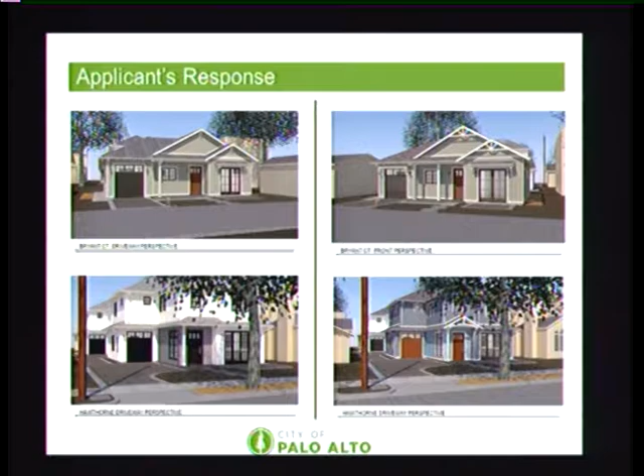The applicant has provided a material board with color swatches, and they've also responded by incorporating more native species into the landscape plan, replacing 6 of the originally proposed species with western redbud trees, Sonoma sage, bush anemones, and other native grass and shrub species.

The project is compliant with the comprehensive plan and all applicable design guidelines. The one issue that still remains is consistency with the performance criteria outlined in the code regarding trash disposal enclosures being located as far away from abutting properties as possible.

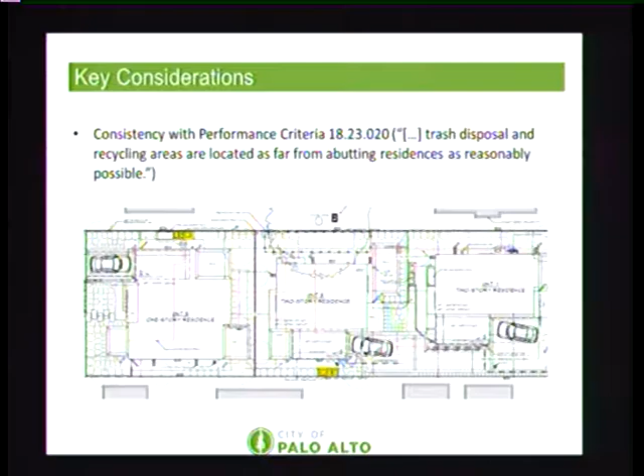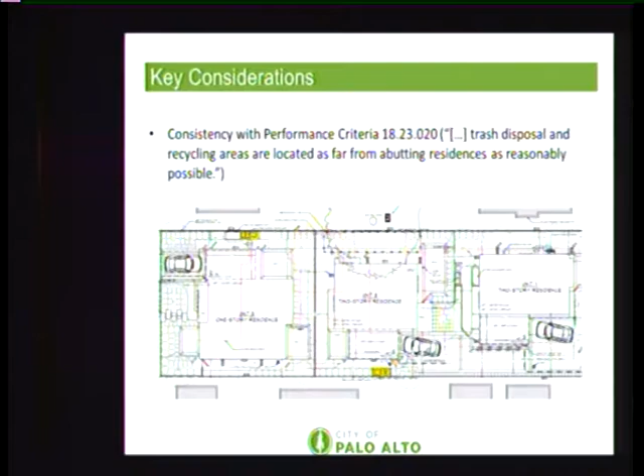As you can see in the highlighted portions of the schematic here, the trash enclosures are abutting the shared property lines on the left and right, of Unit 3 and Unit 2. So we've written a condition of approval to have these enclosures moved closer to the units.

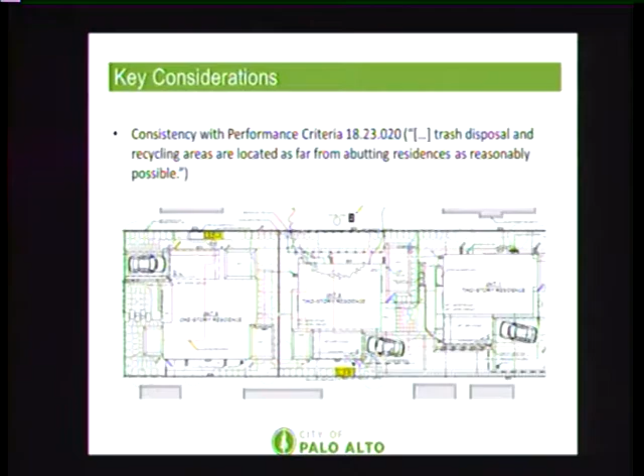That is a consideration we'd like the board to discuss. Otherwise, staff is recommending that the board approve the 3-unit multifamily condominium project based on findings and conditions.

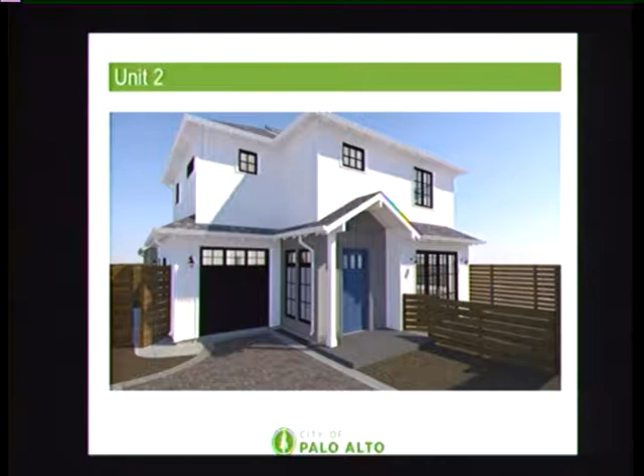I have a question, please. Good morning, Philip. Could you address for me, please, what the code requirements actually are regarding trash enclosures and bicycle lockers for projects of this nature?

Sure. Our wastewater, stormwater division requires trash enclosures for multifamily developments, a separated area and covered enclosures.

But I guess I want to get into it a little bit more deeply. Do they define what they mean by trash enclosure? Are the plastic buckets that the utility supplies us, are those considered carts, or are those considered enclosures, or are they required to build some separate structure? A designated area and structure to house the rubber containers. And is there anything in the code specifically saying what they mean by structure?

It's not common on residential stuff to build a garbage enclosure. Well, this is specifically for multifamily development. Okay, and for bicycle lockers, the same?

For bicycle lockers, what's the standard on that? What is the actual wording of the code? The standard for this type of development is one long-term bicycle storage unit for each unit. And what does the code say? Are the actual words in the code 'a storage unit,' or is it just 'a storage area'? How is it phrased? I don't have it off memory, but I can provide that.

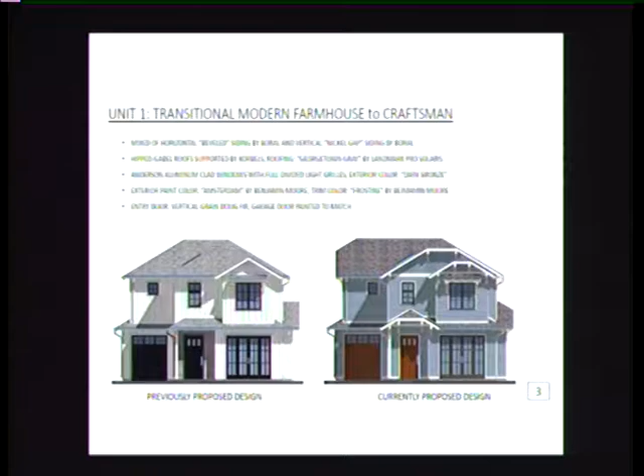And then I have a 3D rendering of it from Hawthorne with landscaping. This is an approximation—please note that's probably a 3 to 5 year landscape-developed approximation. This isn't the first day construction's complete with all the landscaping planned, but ultimately it would end up looking like this.

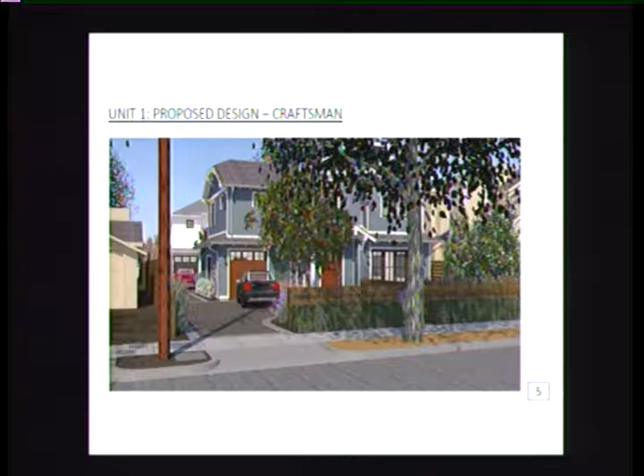Next is the center unit, that's unit 2. I didn't change much, because I was hoping the board would allow the property owner to at least have 1 unit as they originally requested, as opposed to no units. I did add a gable over the entry, realizing that it would help identify the front of the house, even though it's in the center of the site, as the place where you enter.

When you think about it, where those sliding doors are, in this image to the right, that's where a courtyard would be, with a 3 to 4 foot high fence around it to help identify that, plus landscaping. I felt like, since I was going through this exercise, and maybe I missed it previously, that this made a lot of sense to add this gable here.

I considered, but didn't do, adding a gable over the second floor larger window to the right, because of the daylight view issue the homeowner on Waverley was commenting on in previous meetings. I thought that would add some visual interest and a little more style to the house, because it is somewhat simple, I would admit, but I really tried to maintain that valley of openness so the neighbor would not see one more added-on feature to the roof. So I elected not to do that.

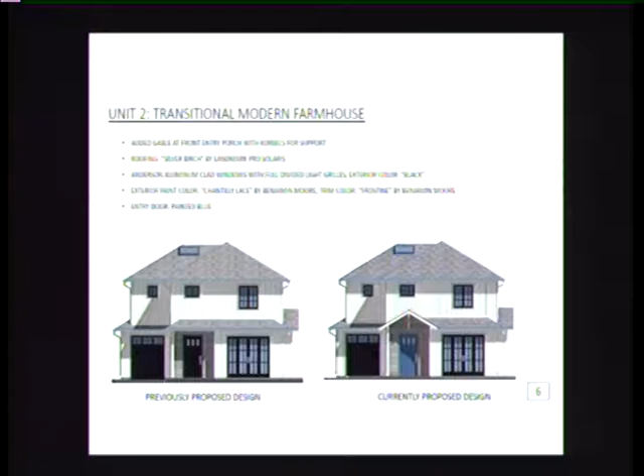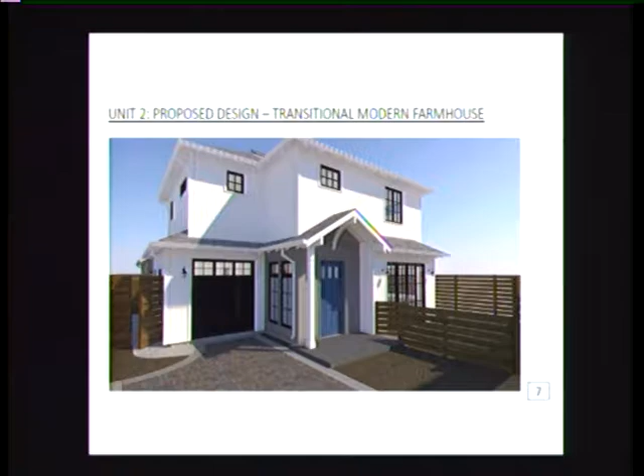The next unit—here's what it would look like without the landscaping. You can see where that gable really does help identify where the front entry is. I think it's a really positive change. And this is what the landscaping might look like 3 to 5 years after it's developed. You can also see the fence for the courtyard, which helps differentiate between the sliders and the front entry.

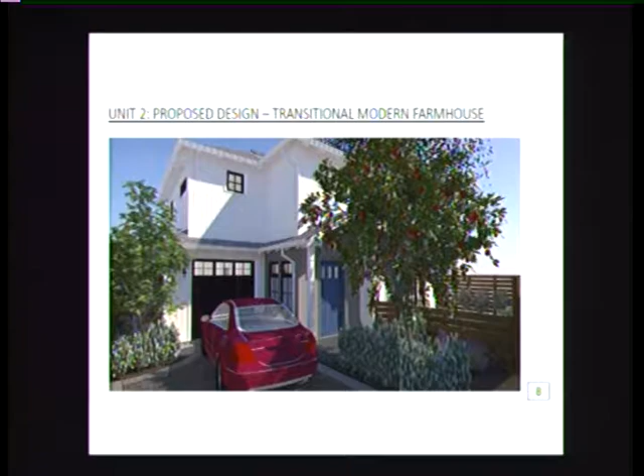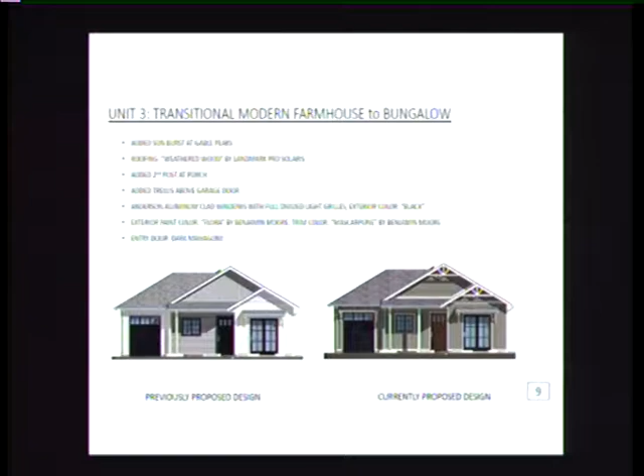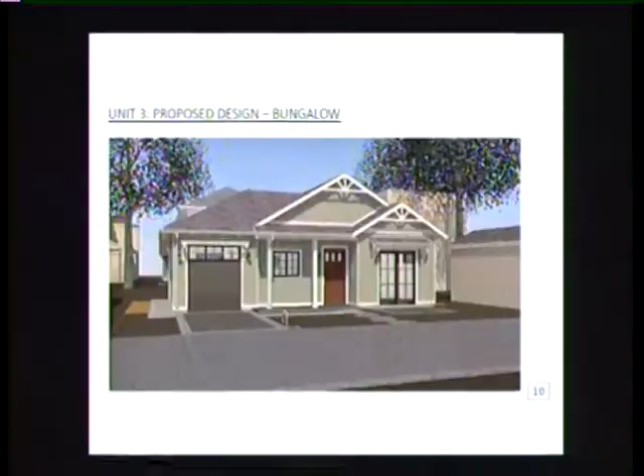And then the sunburst at the eave at the peak of the gables. I added a second post on the porch as well to really drive it home—there's a porch there. And the color on the material board helps, I think, to address what you asked for as a board: more warm colors, more earth tone colors, I should say. Here it is without the landscaping, and there it is with landscaping developed 3 to 5 years.

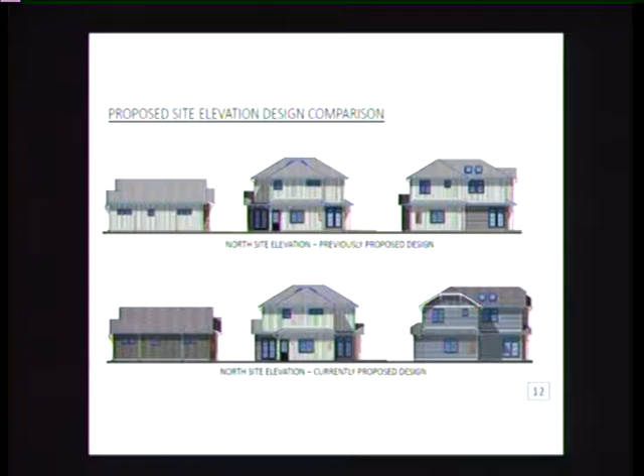So that's a comparison of north. Upper is what it was, the bottom is what it is proposed to be. The same thing for the south side: upper is what was proposed, lower is what was previously proposed... and the lower elevation, site elevation, is what's currently proposed. So you can see the changes from that perspective as well, or from that elevation.

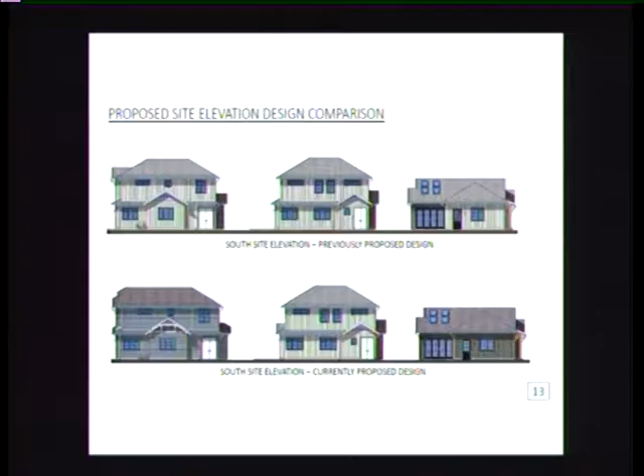And that's really those 3 questions. I wasn't prepared, but I will speak to the idea of the trash enclosures. In my previous presentation, I had a very long slide with many bullet points about why I felt consolidating the refuse for these 3 units didn't make sense, and an enclosure didn't make sense either. Philip actually talked with the appropriate party about the enclosure, and I believe they waived that part—consolidating it—but did not waive the part about locating the enclosures as far away from adjacent properties as possible.

My argument is that this is developed, although it's RM15, as 3 single-family homes. I said that from the beginning. Now, that doesn't mean that there are 3 single-family homes. It's still a multi-family project.

But the intent for the occupants when they live there is that they will feel like they have their own home, their own yards, courtyards, entries. Unfortunately, I can't have its own drive for units 1 and 2. It's a shared drive. But Unit 3 has its own drive.

We have the luxury here of having a through lot. We go from Hawthorne to Bryant Court, so I was able to take advantage of that and have a driveway on the Bryant Court side. Because of that, I didn't have to have a 16-foot wide clearance on the side of the lot for this shared driveway, which if you have 3 units in place, you have to have 16 feet wide, which would have been quite an imposing width to try and develop the properties on.